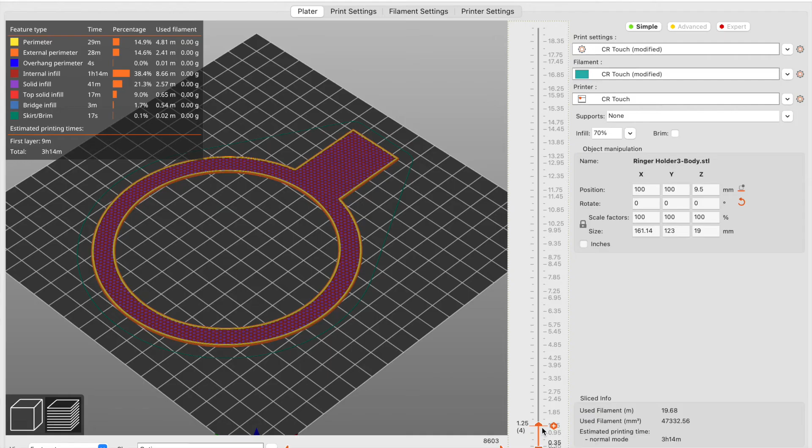In this video, I'll go step by step, and I'll use FreeCAD, which is an open source 3D modeling software, and show you how to create a solid body and export it to an STL and then print it out on a 3D printer.

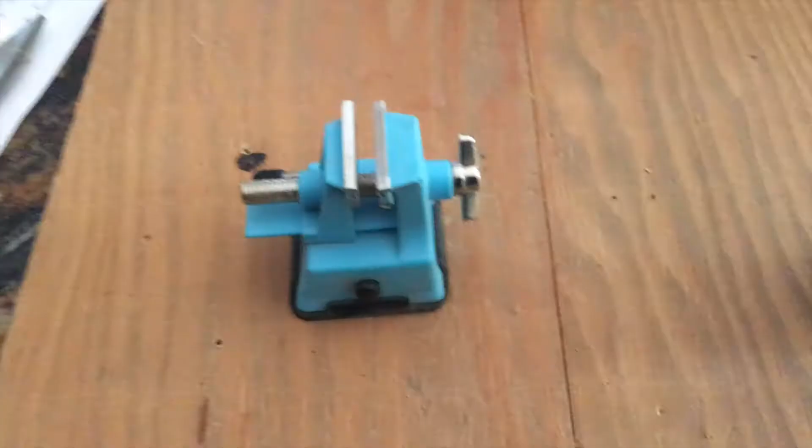So what I want to build here is I want to take this standard magnifying glass and just put it in a simple holder so that I can see what I'm doing when I'm soldering. Alright, so the first thing we're going to do is we're going to create a solid body, and we're going to do this from the part design.

Now with FreeCAD you have to be very careful. They have these what they call workbenches. They're a little confusing to me because I come from a SolidWorks background. You have part design and part, and I've now learned from experience you want to just stick with one because the features don't really merge into another.

So we're going to do part design, and I just said file new, and I'm going to close. I have these other ones open, and so we're going to save it first, and I'm actually on version 3, so we're going to call this Ringer Holder 3. And then we're going to create a body. And we need to create a sketch, and I'm going to pick a plane.

I'm going to say the XZ plane, and the first thing we're going to do is create the outer holder. So when you highlight as these turn yellow, that would make them coincident, but I want it on the center. And it's going to be coincident on the center, and then I'm going to do a second one. And then we can put in our dimensions.

So here are the diameter. So we're going to select the outer one. I have to look at my notes here real quick. That's going to be 117 millimeters. And the inner one is going to be 101 millimeter. Okay. Now you escape one time, and then you can move these dimensions around, kind of put them off there.

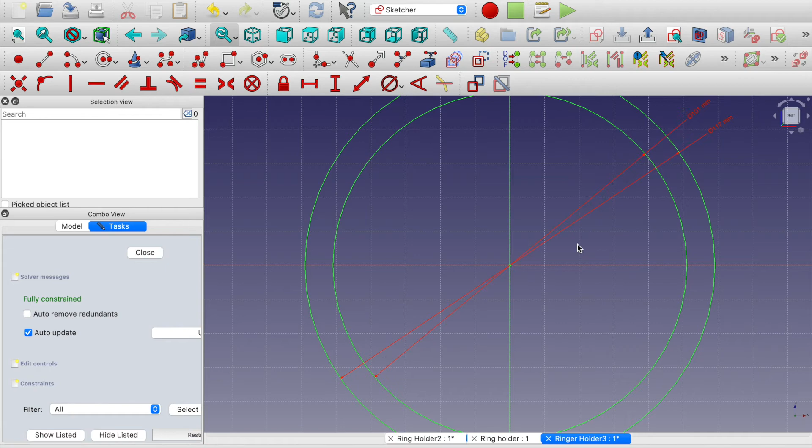And then just to see that you can go back and forth, we're going to close this. And so the sketch is highlighted green, and we want to create a solid body, and that's this pad command right here. Now these are the other ones that I was working on, so we're going to save those and close. And we're going to save this one and close. So here is the one, version 3, that I'm working on because I'm kind of working out the bugs.

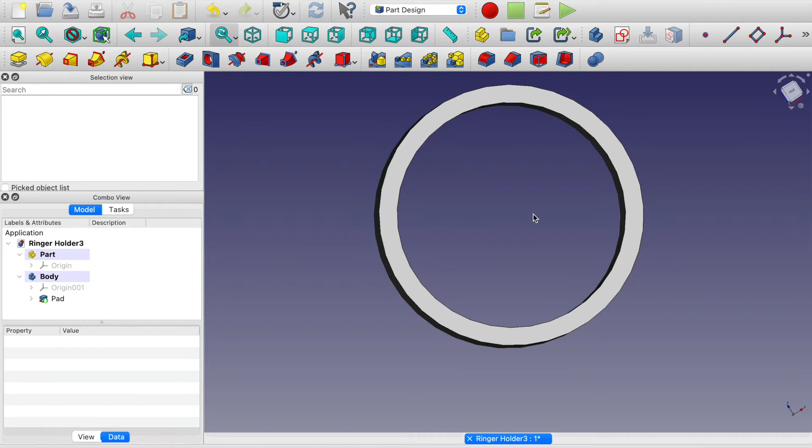Now the length is not correct. We are going to actually extrude it to 19 millimeters because I've been working on a couple different designs. Now the advantage of solid modeling is you can always go back and you add and subtract and whatnot, so you don't have to have your final design immediately. So what I'm going to do, it's oriented here under pad, and the sketch, if you press the space bar, you can see that, and then it also shows and hides it.

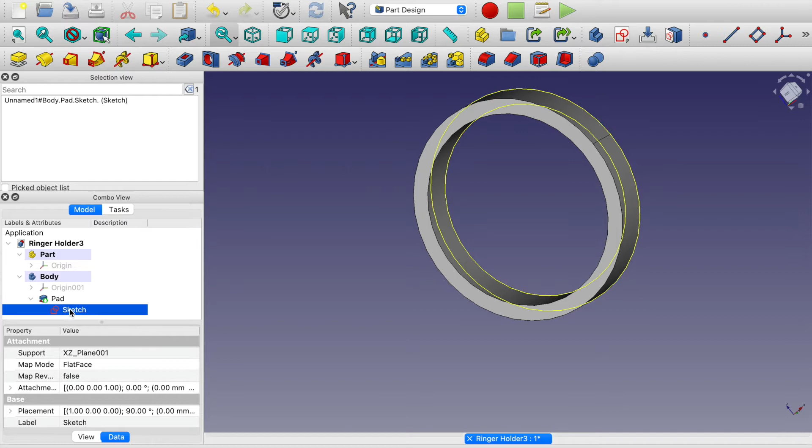Well, we're going to edit the sketch, and we're going to add the parts that I need. On this side, we're going to put a support for a doweling to go into the holder, and on this side we have to make a cutout to make room for the handle of a commercially available magnifying glass.

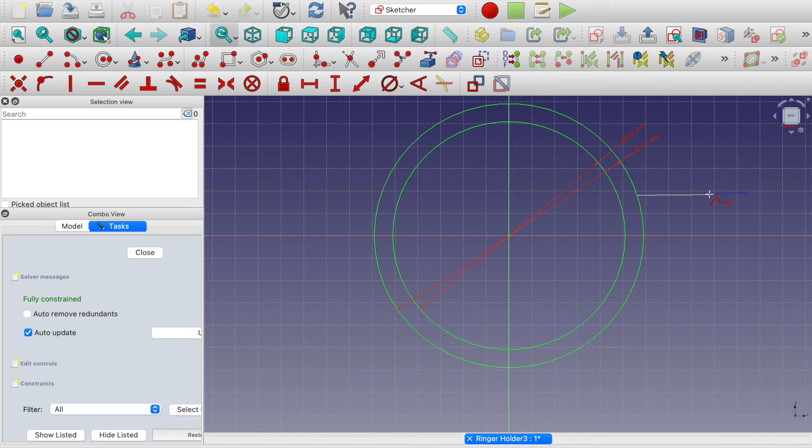So I'm going to grab the polyline tool, and as it turns yellow, it's going to be coincident, and I'm going to make it horizontal. And now you look, as I go up and down, and right there, see how that line on the red line, the horizontal line, that will be a horizontal coincident. And the same thing with the vertical, this will be vertical, and then I want to make it coincident there.

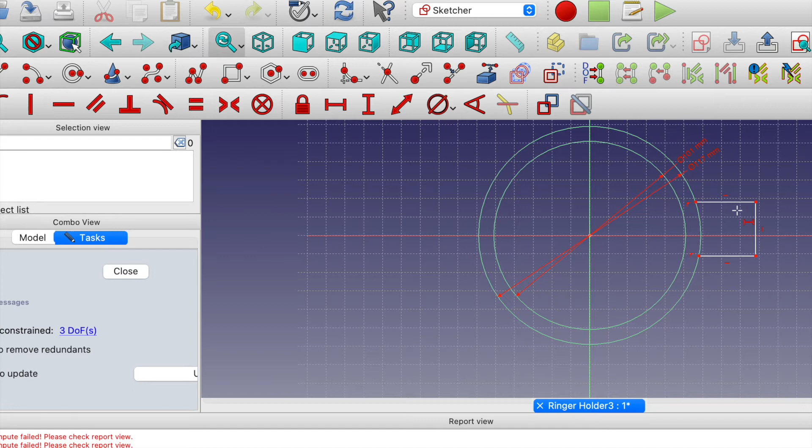And it looks like I missed one of these. So this tool right here is constrain horizontally. This should have been horizontal, and we just make it horizontal. Okay, now I'm going to make the total distance 40 millimeters thick. So these are our constraints.

We do need to trim this line right here, so the trim command is right here, and that will trim this. We still need to constrain this horizontally, symmetrically.

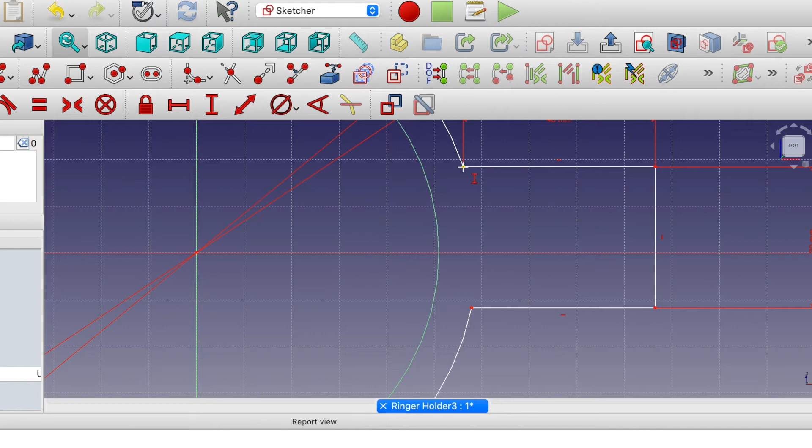And if I grab these 2 points, since this is 30, and we're going to do 15 millimeters, this is now symmetrical. Okay, that'll put a handle on it, and then you can just close it to see it.

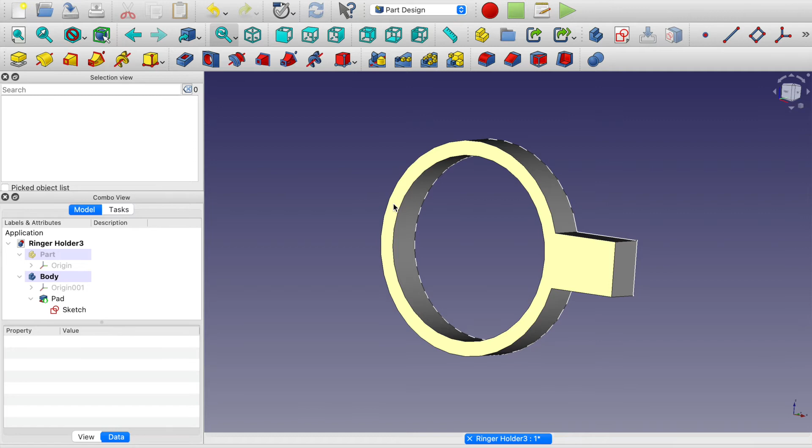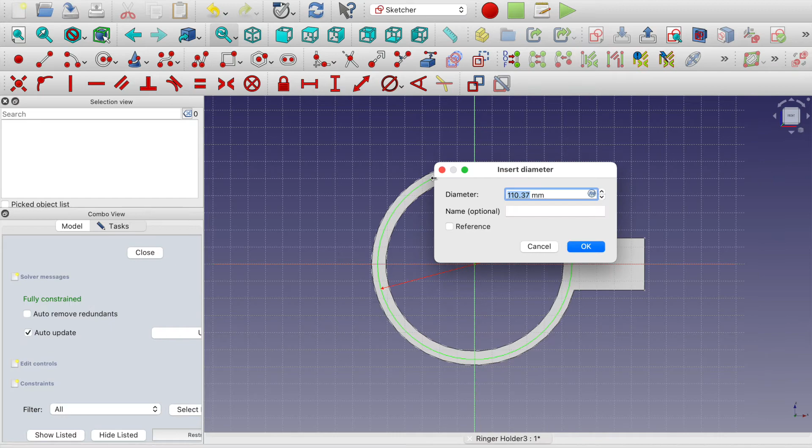All right, so we're now going to do what's called a pocket. We need a divot in here to hold the magnifying glass. This is really just the frame. So we're going to select this surface and create a sketch. And I've already determined I need 114 millimeter from the center out to here, and then a diameter constraint. Okay.

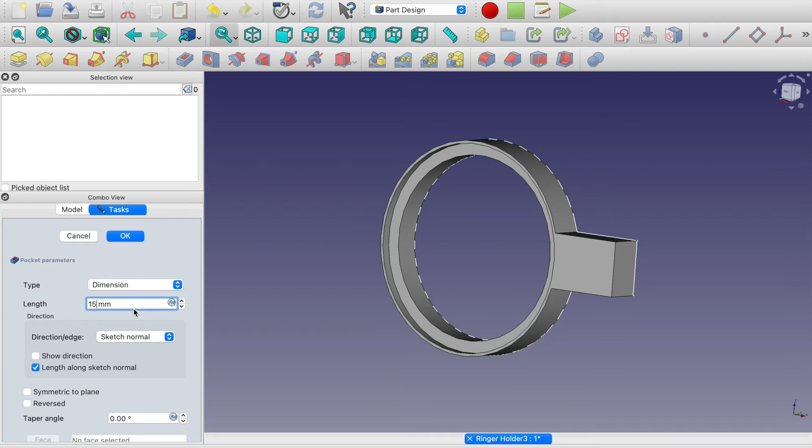So just to show you how this works, if we're going to do a simple pocket like this, here's the pocket, that's selected, and the depth that we need is going to be 15 millimeters. All right. But I also need a slot over here to hold the handle. So if we expand the pocket and we go back into this sketch, we can do that right now when we do the pocket.

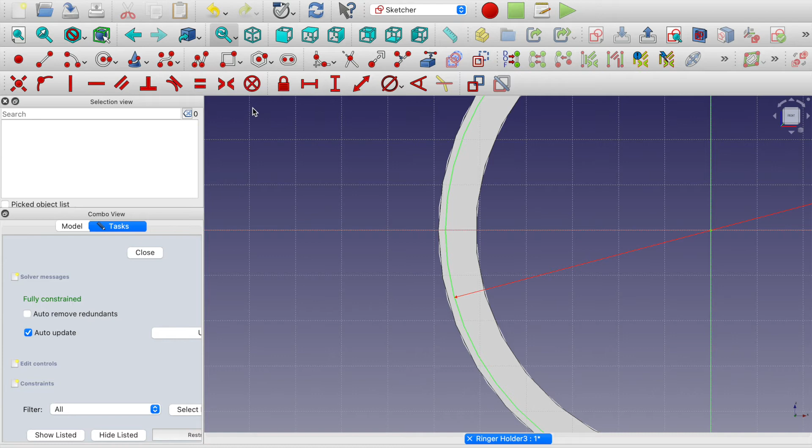And so on this side there are a couple ways we could do it. And I think the easiest way is to do like we did on the other side, but this is a subtractive feature. And horizontal, and horizontal. And I know that this needs to be 40 millimeters long. So I've measured the handle, and then we're going to grab a vertical distance from this point (20 millimeters), which is half of it.

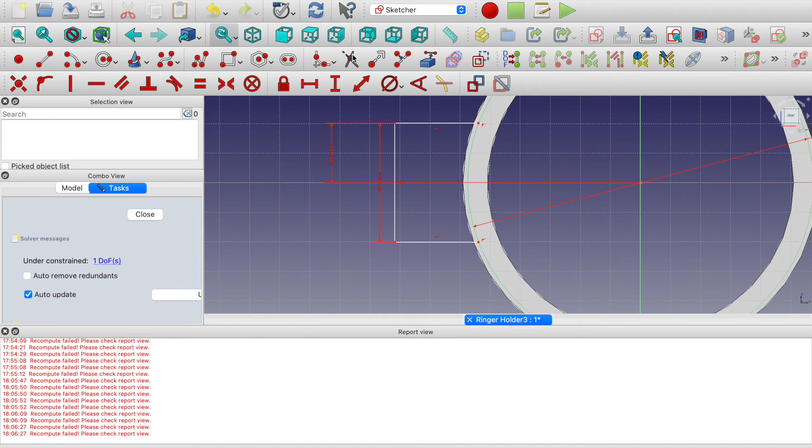Escape one time, and then you can drag these off, and you can see these. Now, in order to cut this, I need to trim this. So we're going to do the same thing we did on the other side. Trim this, and then close. And so that creates a space for the handle over here, a space for the magnifying glass, and then we'll put a lid on it, and I might have to do some other things, but this will basically hold it.

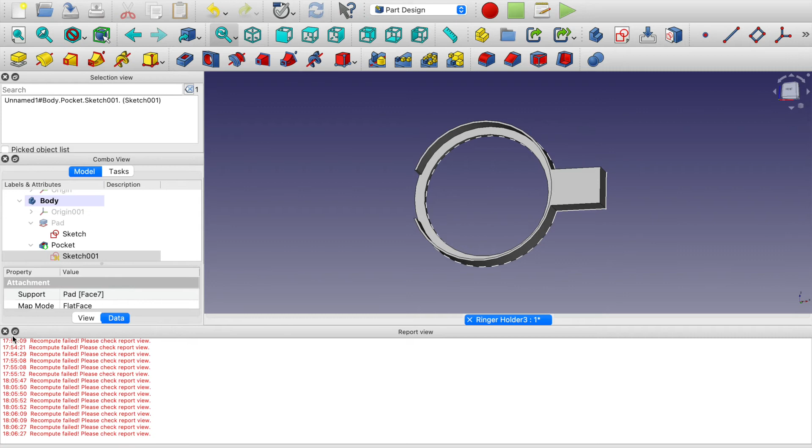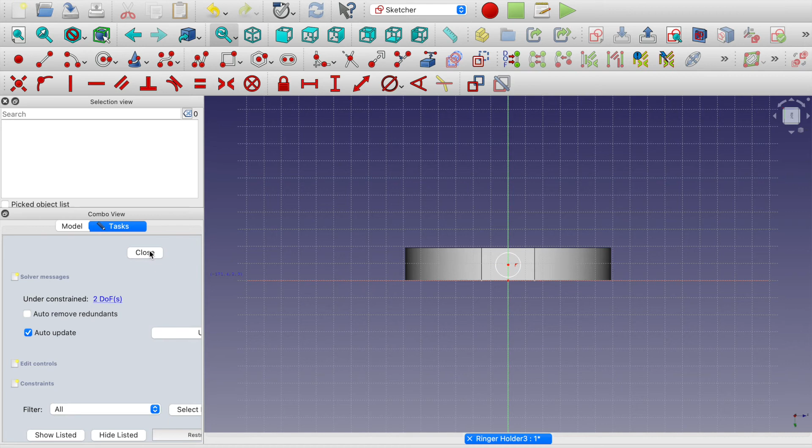Now I need some way to attach it, and so I need a hole in here. So again, we're going to do another subtractive feature. So we'll select this face, and then sketch on this face. We'll do a circle. I'm going to have to go get that. And then you specify a depth. This is green, so that's selected, and then we'll do a pocket, and then specify a depth. And then I'll have to get that.

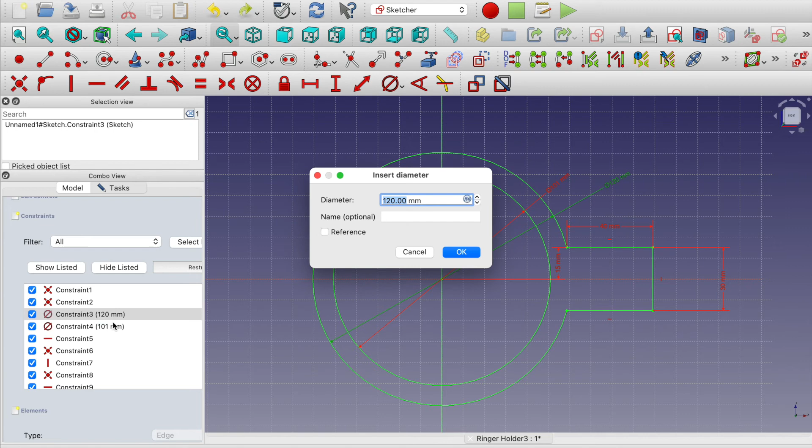Now before I print this, I need to make another modification. This outer wall is just too thin. So I think I'm going to expand this a little bit and have a thicker wall. I intend to 3D print this, and the wall thickness has to be wide enough that you can get a crosshatch in there. And so we're just going to increase this a little bit and then take a look. All right, now let's exit out. Yeah, and that's a lot better.

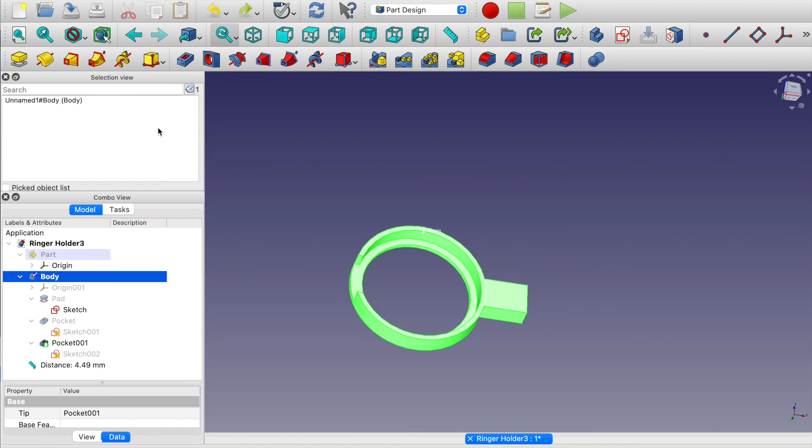So I think we're ready to print the prototype and see how it works. My slicer program requires an STL, so I'm going to select the entire body and export an STL, and then I'll run it through the slicer program. I've imported into my slicer program. I'm using Prusa, and you just export to G-code, and then we'll flash it onto a micro SD card.

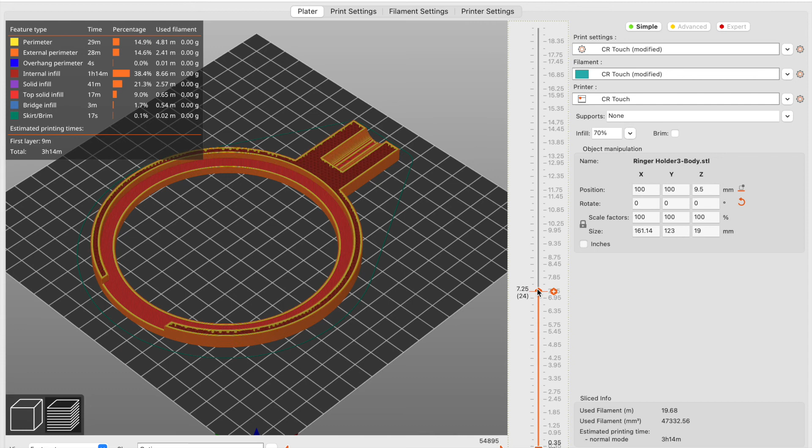You can also preview all the layers and simulate how it will look. And I'm glad I made the wall thickness wider, because you can see that I'm going to have that cross-hatching strength that I need here.

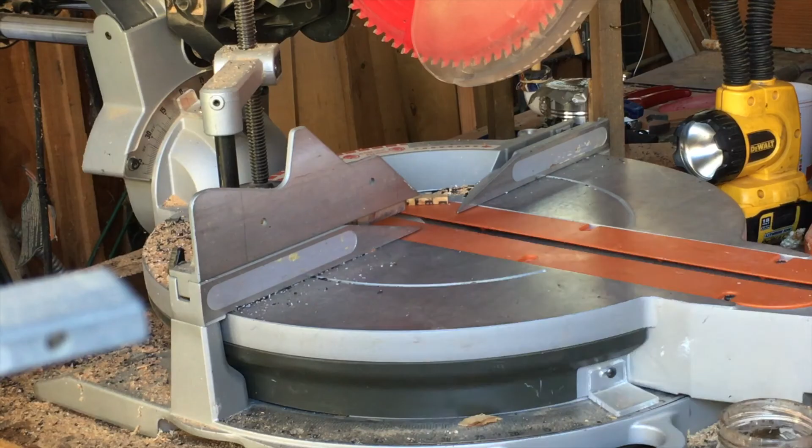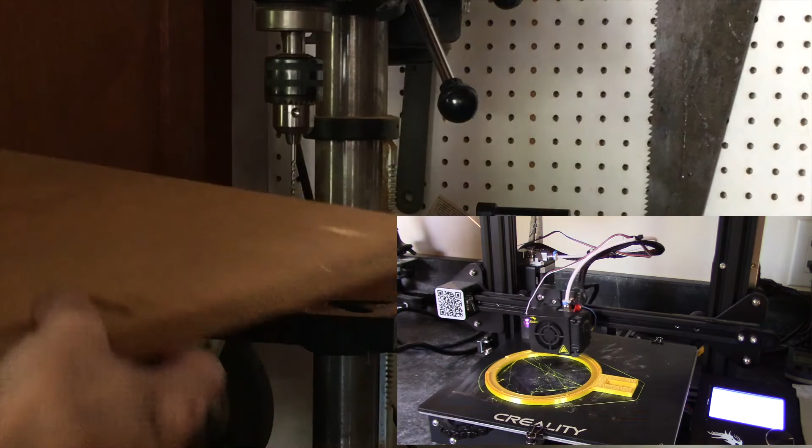So while that's printing, I'm just going to go out to the shop and get some materials that I need to build this. It's not going to be pretty. I just need something to hold this magnifying glass. So I'm going to grab a 2x2, cut it to length, and a piece of scrap plywood, and then get some doweling and drill a hole in there. And that should hold it. So here's the final print, and I'm ready to put it together.